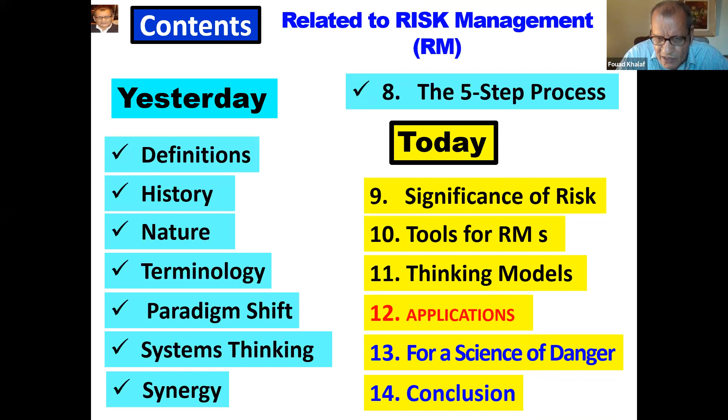In order to make a link between yesterday and today, yesterday Dr. Fatma prepared something, but for my side, I just didn't remember. So, Dr. Fatma, tell us what you wanted to say yesterday. Okay. Thank you, Dr. Fouad.

So, we are going back to talk about the origin of the words risk and hazard. Just a quick reminder that hazard comes from the Spanish azar, which means the roll of dice. And this means that it comes from the Arabic zahr, which is dice in Arabic. Also, the French word hasard, which is le hasard, we don't pronounce the H and D.

This means that it comes from what? From Rezq, the Arabic word Rezq, which can mean God-given or fate. It has been developed in medieval times that risk can come from the Greek word rizikon, meaning roots that protrude and can block your way, or the Italian word risico, the Spanish riesgo, the Albanian rrezik, and the German Rysigo. So this is the root of the word risk.

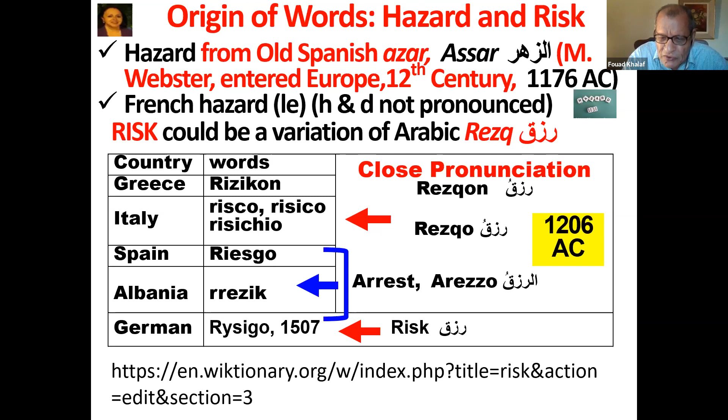I remind you also one of our team is called Ziad Risk. So risk could be a noun, could also take different forms.

Today we are going to talk about tools, what tools we use for quantitative, qualitative analysis. Dr. Ziad will touch this, and thinking models and application.

You see what's written below: risk is not bad or good. In Arabic, it can carry both terms, but mostly good. But in Europe, what we are talking about is the bad side of risk. But it could be bad or good, it just is.

We should not argue about it, and it will exist whether we choose to acknowledge it or not. It is impregnating, penetrating all our life.

The thinking models we are going to talk about are just for enhancing creativity, perception and remembrance. Why? Because as we talked yesterday, risk is relative. Relativity in risk is very high.

Sometimes we don't agree on the same word. The same word may have two different senses, two different meanings, like risk. Risk in Egypt carries a good sense, but also has some ingredients of bad. It depends on the culture, and who is hearing it.

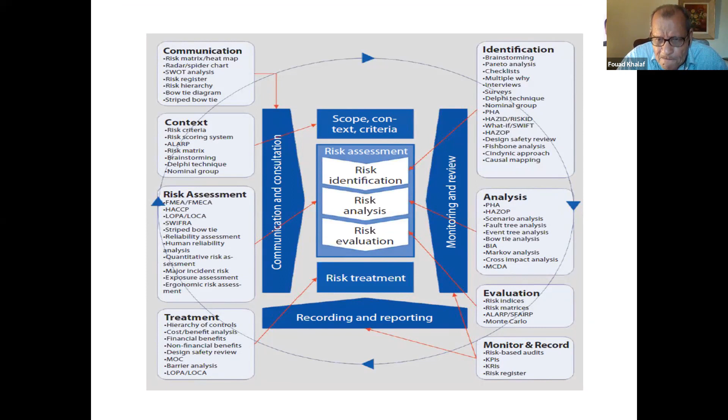Tools are numerous, like what you say, and Dr. Ziad is going to talk about some of them. Dr. Ziad: Hello to everyone.

Yesterday we learned about how to manage risk and its effects on objectives, which requires a structure. International standards give us two important standards for this: ISO 31000, which covers the risk management process, and ISO 31010, which covers risk assessment techniques.

Here in the photo we will see the process according to ISO 31000. That process includes communication and consultation, scope, context and criteria, risk assessment—which includes risk identification, risk analysis, and risk evaluation—and after that, risk treatment or risk control.

After that, monitoring and review, and recording and reporting. During establish purpose and scope of the organization...

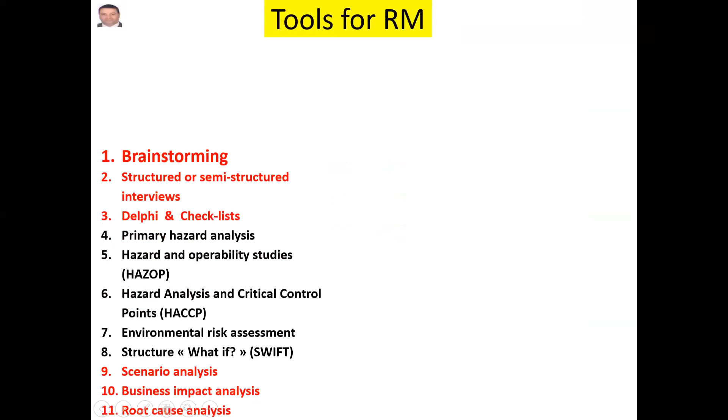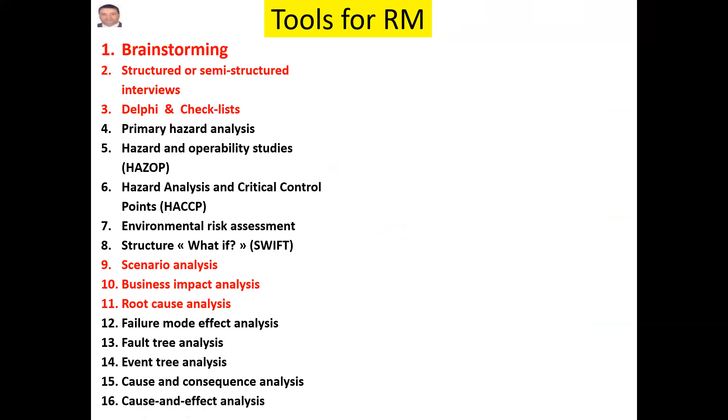...the organization should select or develop a risk assessment matrix that the stakeholders agree to be used in the risk assessment process. This key component is used to define and determine risk levels within an organization.

The context of the risk assessment assignment will determine the size and makeup of the team needed. The risk assessment team should include a cross-functional group of individuals who are familiar and knowledgeable with the hazard and operations. A risk assessment team of about 3 to 10 members seems to work well; less than 3 members may not provide enough insight into the risk assessment.

Here is the process: hazard risk identification, risk analysis, and risk evaluation. Risk, hazard, and source of risk—if risks are to be assessed, hazards must first be identified. This is the first step.

Number two, risk analysis. Risk analysis follows these tasks: determine the severity of consequences, estimate the likelihood of occurrence, assess the effectiveness of existing controls, and estimate the risk level.

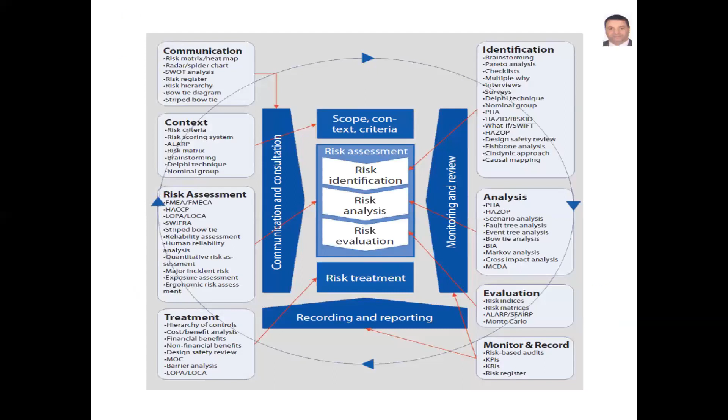And after that, risk evaluation. Risk evaluation involves comparing the estimated risk levels with the defined risk criteria to determine the significance of the level and the type of risk.

Okay, next, here are the tools that come from ISO 31010. We have many tools like hazard and operability studies, what-if analysis, and layer of protection analysis that detects the layers of the systems and evaluates the control system within the system.

FN curve, which is used in quantitative risk assessment, and risk indices. Of all these risk management tools, you must select a tool that's suitable for every step, as explained in the last slide.

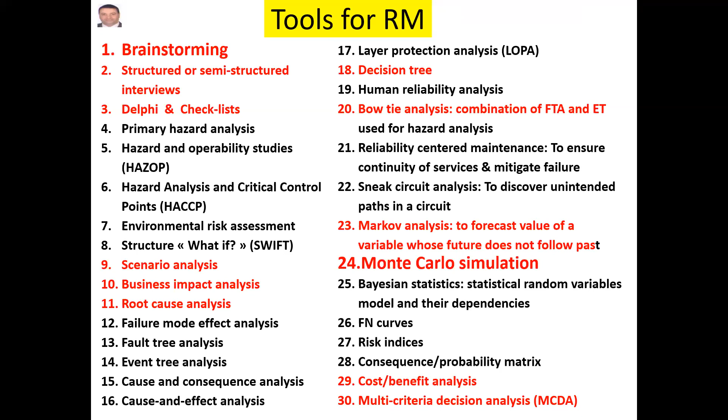Next. Today we will take an example: what-if hazard analysis. This is a tool used to identify hazards; it is well established and widely used.

It is a qualitative method. We learned yesterday that there are many tools, qualitative and quantitative, and also many semi-quantitative tools. What-if hazard analysis is a qualitative method for identifying and analyzing hazard scenarios, existing controls, and needed controls. What-if uses a multi-skilled team, as explained, and answers a series of 'what if' type questions.

What happens if every case in the system? The method has a relatively loose structure. It is a very common method, and it is widely used with checklists.

The first step of what-if analysis is to define purpose and scope, with a clear purpose statement that is specific and measurable.

Number two, assemble team. Based on the purpose and scope, the team should be selected to include experienced, knowledgeable individuals. Number three, communicate objectives and requirements to the team. The facilitator should clearly define the purpose, scope, and objectives.

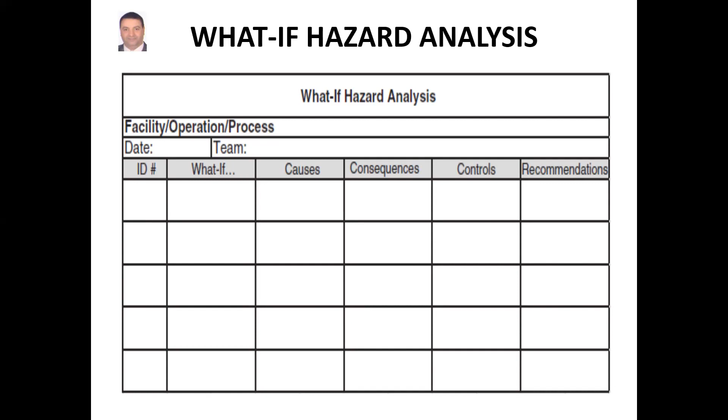Okay, Dr. Hanan is going to talk about the other concepts. Hello everybody, today I will complete with you the common concepts of risk.

Please, from now, you should wear black glasses and act as a movie director, to know that not all of the risk or all of the elements are clear or known. If you saw the Titanic film, you know that not all of them appear on the surface.

Years ago, only health, safety, and environment were the three things considered. They forgot loss of data, loss of time, loss of image, all of this.

The Iceberg model is useful in estimating and evaluating risk. It considers possible hidden elements, especially when handling cost, because it guides the selection of multiplier factors to apply on direct cost or indirect cost to account for.

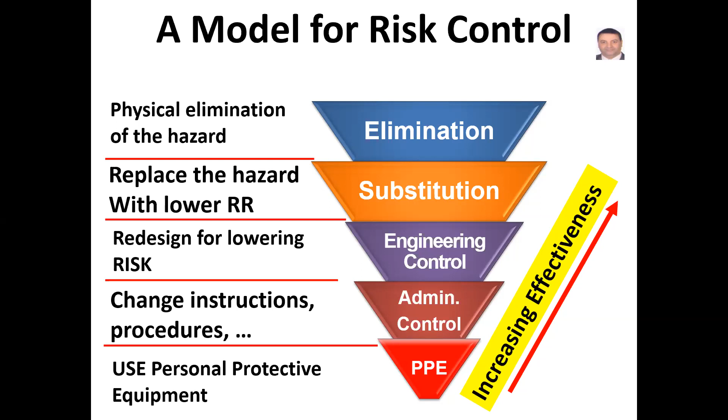Because that layer's methods depend on the human applying the instructions, you can give workers a helmet and safety boots and train them to use it, but they may not apply this and leave them. So it is the weakest against hazard exposure. Their effect is limited and dependent upon proper selection, use, and care.

Here, hierarchy of risk control - we look at how to control risk. Risk control can be split into two things: loss control and risk finance. Loss control includes two items: risk avoidance and risk reduction. Risk finance includes risk retention and risk transfer. We can explain more expressions like risk avoidance.

Risk avoidance is avoiding completely the activity giving rise to the risk. For example, never travel by air to avoid the risk of being involved in a mid-air collision - that is risk avoidance. The difference between risk avoidance and risk elimination: risk elimination usually has a wider meaning. It implies removal of risk without necessarily ceasing an activity completely. Example: redesign of a process to remove a particular risk without stopping the activity.

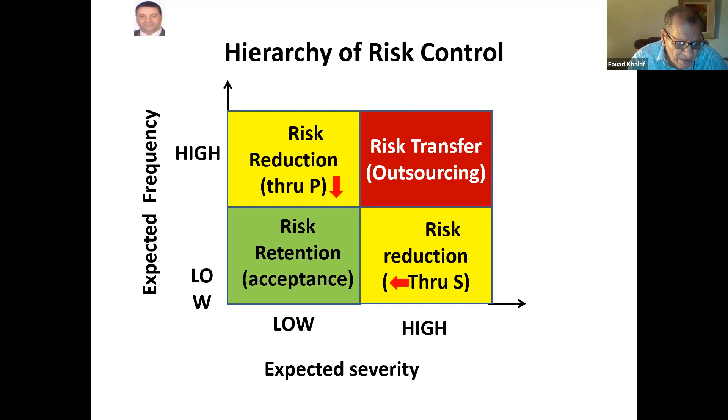Now, Reem, I think you are ready to talk about risk management and decision making. Yes. Thank you, Dr. Fouad.

Here I'm going to talk about the decision-making process and its relationship to risk management. These decisions and risks are very correlated to each other. When we face risks, we need to take appropriate decisions to reduce this risk, but at the same time, our decisions may entail new risks. So it's a cyclic situation. What we need for this is a systemic approach.

Both processes are total quality: plan, do, check, act, or improve.

About uncertainty: when we talk about uncertainty, we have to remember the iceberg model. Each problem is a function of two factors: ability to identify the problem and the uncertainty of the information. These two factors construct the knowledge matrix.

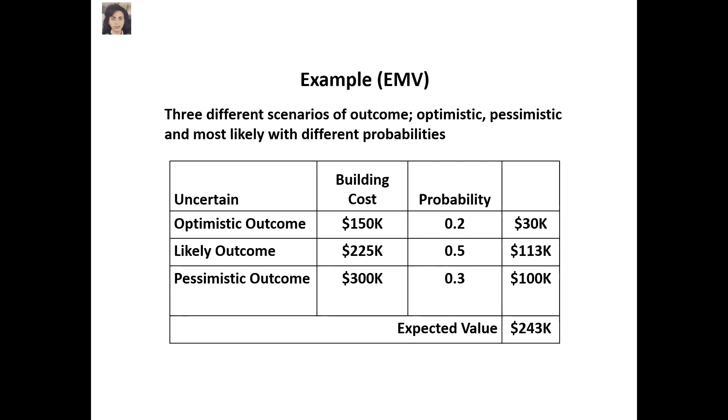Now, how can I take the decision? I need to evaluate these scenarios. I will calculate the EMV for each decision alternative, and you will see that the alternative of upgrading the plant has a higher EMV. So to conclude, we have several models that help the project manager make his decision based on evaluating the risk.

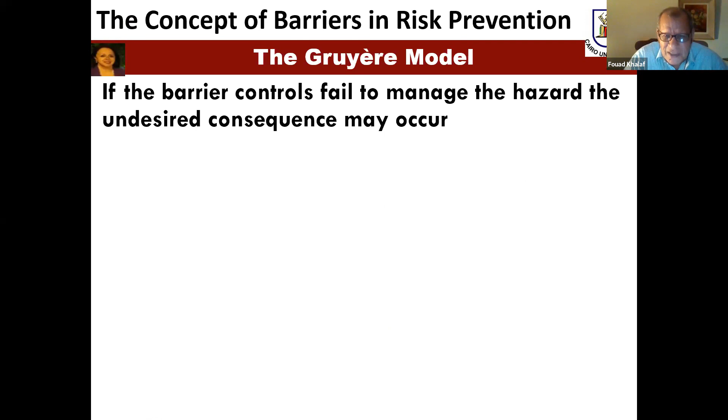So the concept of barriers in risk prevention, which is known as the Swiss cheese model, as Dr. Fouad has mentioned, the Gruyere or the Emmental, which is with holes. So what is this concept based on? It is based on two approaches: the multi-layer defense model developed by James Reason, and the tripod theory of accident causation developed by Shell International Exploration and Production.

So if the barrier controls fail to manage the hazard, the undesired consequence may occur. We have many layers. The hazard passes through many layers containing holes. So even the best barrier will not be perfect. It may have holes. So as we see here, an undesired event will happen, then we won't be able to prevent escalation, and we will have consequences. So this model is developed to really identify and understand some of the accidents happening. Next slide, please, Dr. Fouad.

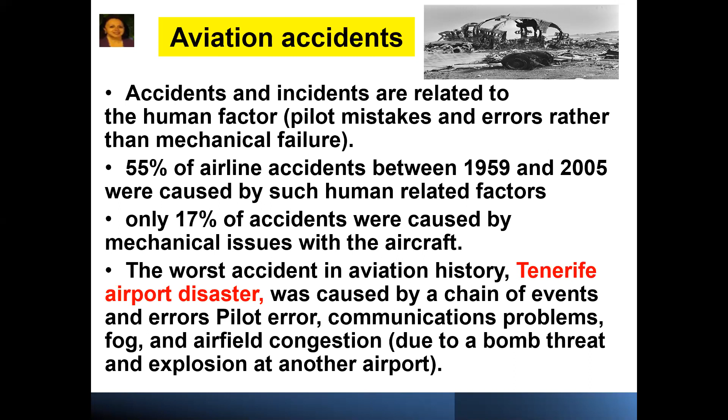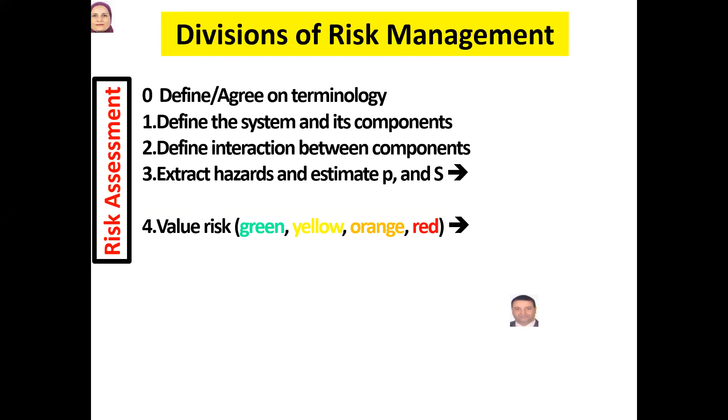Okay, to conclude what we said, we want to make a risk management that we said has 5 steps. The first 4 steps, which we called risk assessment: at first, at 0 level, you should agree on the terminologies. Because if you are talking in another language, your estimation or assessment won't be right. So you should define and agree on the terminology, so all of the team will talk in the same language. Then begin to define the system and its components, as we said, four corners, with actors and the environment and the process and everything.

Then define the interaction between components. To define interaction between components, you should think not linearly, but by system thinking, because as Dr. Fouad said yesterday, the correlation will be not linear, but you should multiply n times n minus 1. For that, you should define the interaction between all the components in the system, which you define its boundary and separate the system from the outside.

Then after that, you will wear black glasses and begin to extract hazards. For every hazard, you should estimate the probability of the undesired event to happen and the negative consequence, which is called severity S, because we estimate the risk number, which is the multiplication of probability times severity. After you make your estimation, you begin to evaluate. When you evaluate, you want to know the value of the risk.

Here in our lecture, we make our matrix with 4 levels. You can do more than 4. But as Dr. Fouad said yesterday, we prefer an even number to be more honest, because with any odd number, if I choose 5, all of the time I will choose 3. For that, you should take an even number. Here we took 4 times 4 in the matrix; the safe zone is green, the highest risk is red, and in between yellow and orange.

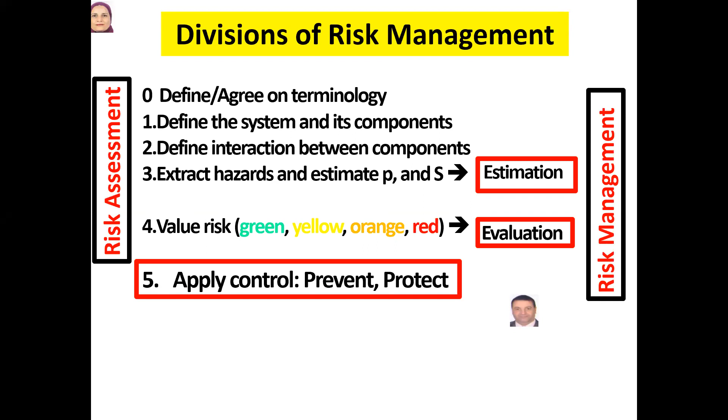After you evaluate your risk, if it is accepted, you go to documentation. If not, you should apply control to prevent by decreasing probability or protect by decreasing severity.

Dr. Ziad will complete about the 4 risk ranks and the diagram. Let's go. Yes. Please, Doctor.

Here we will see the risk matrix. Risk matrix is a method to measure the risk. It is between probability and severity. If we use words to explain the risk matrix like low, high, it is called a qualitative risk matrix. But if we use numbers 1, 2, 4, it's called a semi-quantitative risk matrix. Another figure is called ALARP. ALARP is an abbreviation of as low as reasonably practicable. These expressions come with the study called QRA, quantitative risk analysis.

If we divide risk analysis into 3 categories: qualitative, semi-quantitative, and quantitative, of all operations in any facility, 100% of these operations may apply a qualitative risk matrix, like HAZOP, what-if analysis, and checklist brainstorming. It's called qualitative risk analysis. But when we use the semi-quantitative risk matrix, only 10% of the activities, like layer of protection analysis. In the third stage, 1% call for QRA, used for the petrochemical industry that impacts the environment and safety, and maybe fires and explosions that affect the surroundings of the facility.

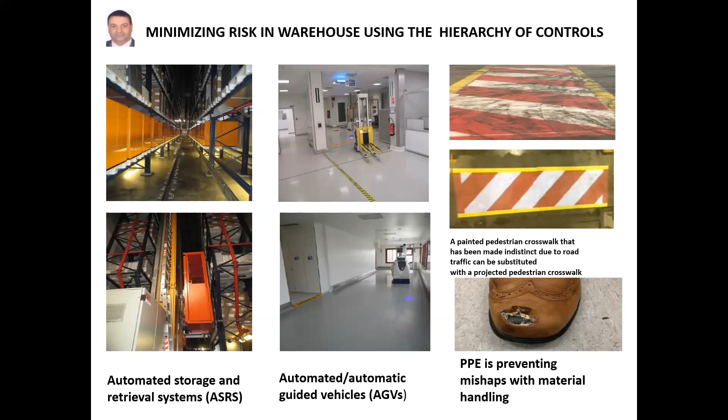Okay. Thank you very much, Dr. Ziad.

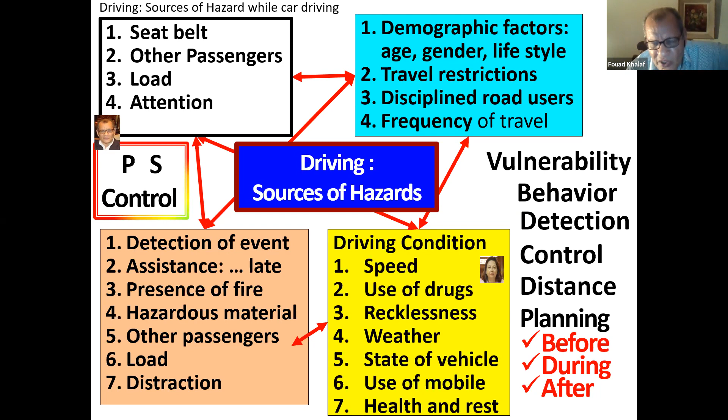Having a motorcycle and not having a helmet, how do you call it? This is a near miss, we call it in risk. This is something undesirable in other cultures. Okay, now risk management in medical.

The 6 coming slides, I would like to shorten it because we have now somewhere around 15 to maybe maximum 20 minutes. Okay. Salma, go ahead. Okay, Dr. Fouad, happy to be with you.

Let me, in short, tell you that medicine deals with uncertainty. We are dealing from the history of the patient. We don't know what the diagnosis is, what the investigation results are, what the management plan is. So we are dealing with uncertainty from the beginning, and risk is considered in diagnosing disease, in its causes, and in the management, whether medical or surgical.

Health components should be in balance: physical, mental, social, environmental, and spiritual. This is my comment on the question from yesterday about components, because health has 5 pillars. Patient safety is the best example for applying risk management, using the terms, and reflecting it.

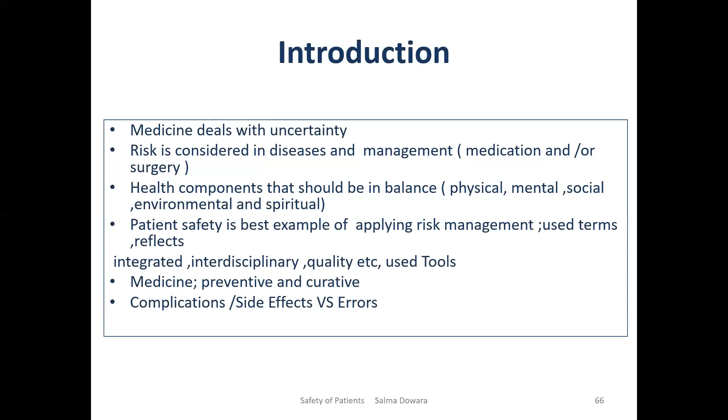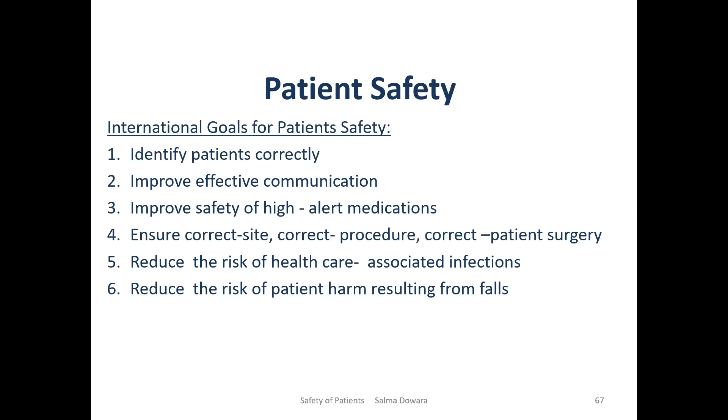In patient safety, the goals are mainly to identify the patient correctly, improve effective communication, improve safety of high alert medication, ensure correct site, correct procedure, and correct patient surgery, reduce the risk of healthcare associated infections, and also reduce the risk of patient harm resulting from falls.

When we make documents, types and examples of error are not different from what we have discussed before. Adverse healthcare event: commission or omission arising during clinical care, causing physical or psychological injury to a patient. Error is the failure to complete a planned action as intended, or the use of an incorrect plan of action to achieve a given aim. Healthcare near miss, it is the same as we have said before. Adverse drug reaction: a response to a drug which is noxious, unintended, and occurs at doses used for prophylaxis, diagnosis, or therapy.

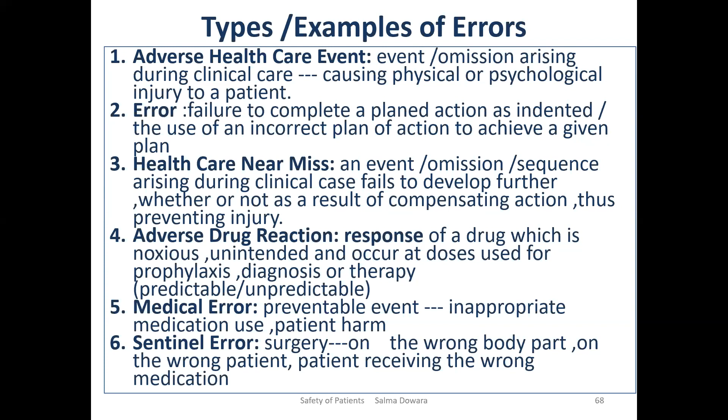Medical errors: a preventable event, inappropriate medication use, and causes patient harm. Sentinel error, or surgery on the wrong body part, or the wrong patient receiving the wrong medication. We should discriminate between errors or mistakes and the complications of therapy. This is for doctors, not for you.

When we come to types of safety, they are the same: environmental, medical safety, surgical safety, electrical, laboratory safety. Very important, because we have a checklist for safety in labs, as Dr. Hanan told us. Sanitation, infection control, and blood safety. This is a big category. Equipment installation safety.

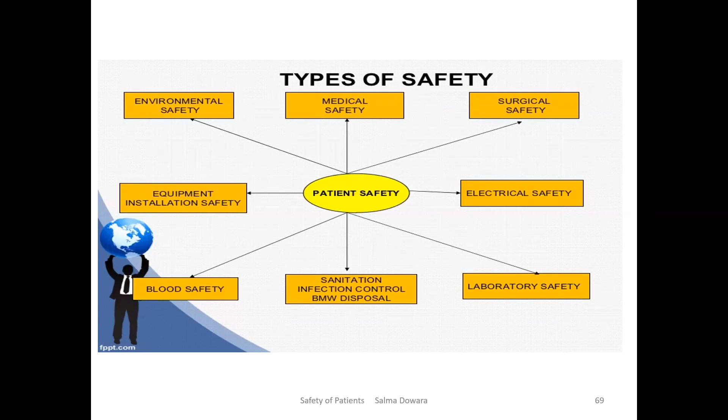Next slide please, Dr. Fouad. Yes, to minimize these errors, in the beginning we should agree on the terminology, because sometimes we use errors, sometimes mishaps, sometimes mistakes. So this is for discussion. We use the WHO checklists, and the best example is in surgery: pre, during, and post. Proper techniques, and this needs training, of course. Full documentation, very important, because we return to it and make many researches from it.

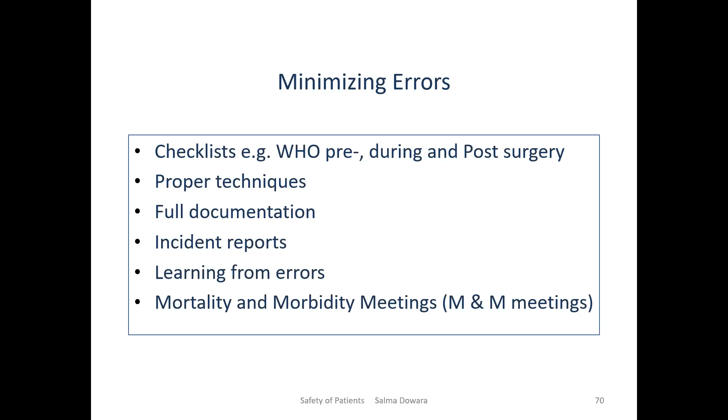Incident reports: there is a process of incident reporting, and we should make an environment and culture of no blame, no punishment, to learn from errors. So we make meetings for mortality and morbidity, to allow people to tell the truth, discuss the mistakes and try to overcome them. And when we discover a defect, we make training and awareness orientation. This is very important. Next slide, please.

These are the WHO lists for the sign in, time out, and sign out. This is pre, during, and after closure of the wound.

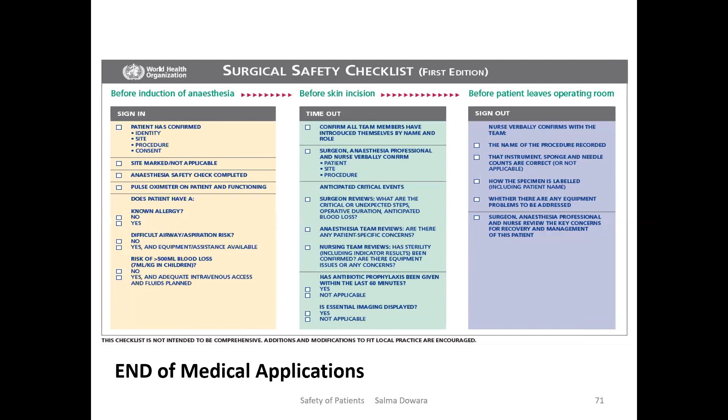This is the shortest presentation I have made. This is a special reduction for you. Thank you.

Okay, now an application on the drilling profession about selection of a casing tender. We have in the Gulf of Suez a certain formation, active salt, that can push on the casing and cause it to collapse. The problem was that in the past we were running a lower grade 9 5/8 inch casing. Imagine a drilling plan for 40 development wells. The source of the undesired event is an active salt bed between 10,000 and 10,500 TVD. I'm using drillers' terminology, but it follows the same principle of risk.

The undesired or feared event in this case: we run pipe, we cement it, and later we discover it collapsed, it's been damaged. Why? Because the salt moves with time and closes on the pipe, and the pipe is not designed for this. So the best way is to select a pipe that can resist this for a certain period of time, which is the life of the well.

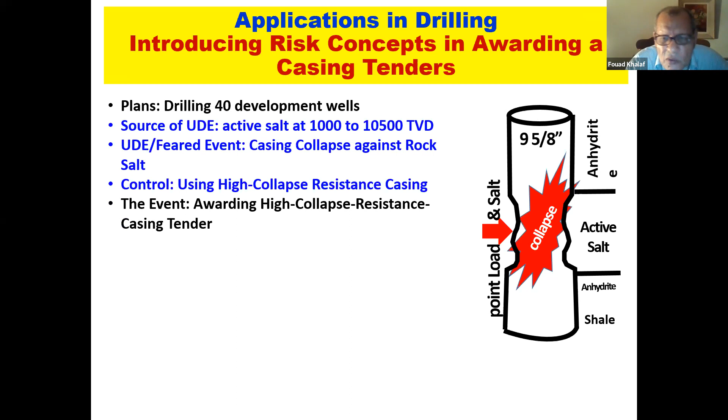In this case, we want to issue a tender for 40 development wells, 500 feet per well, majorated by 10% more, and we will introduce risk management in the evaluation of this tender. The objective is to show how risk influences decision making. The apparent decision goes to the left. With risk, the right decision comes later on.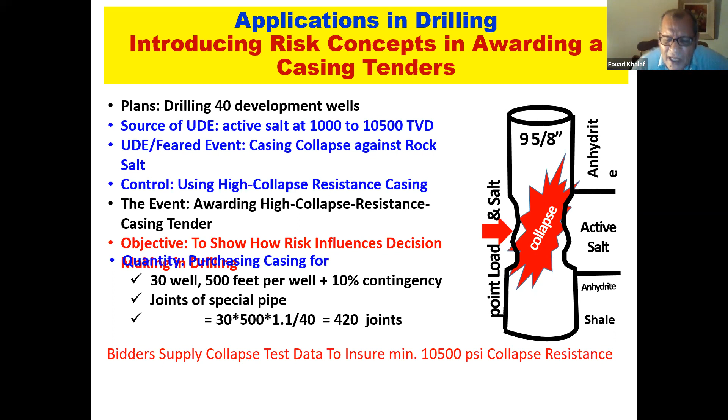The quantity we have to purchase is for 30 wells, sorry, I changed the figure, 30 wells, 500 feet per well. This means we have to order 420 joints of special high collapse resistant casing. Bidders supply in their technical envelope test data run by the mill while manufacturing the casing, which will be used later to define a probability of failure or of satisfying requirements to prevent casing collapse.

The parameters: we have data on the collapse resistance of the casing from two companies, Company A and Company B. They gave us, say, 50 data points. What's the average collapse resistance in pounds per square inch? It is 10,850 for A, and B is higher. Higher is better, but we will see later that maybe higher is not better. Standard deviation plays an important role here. The dispersion between the tests is higher for B than for A.

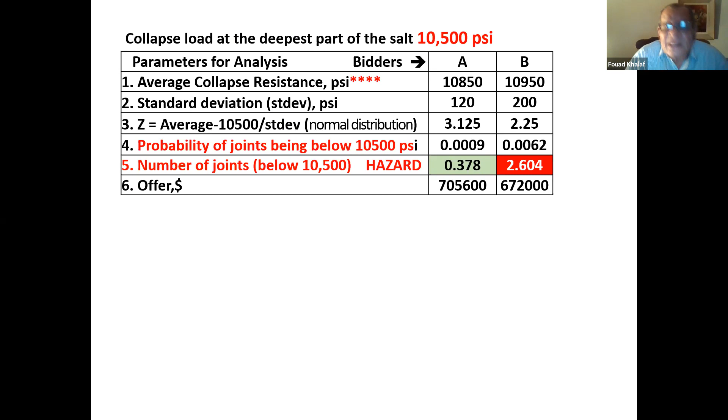The Z factor, determined and defined here, is 3 times the standard deviation for A, and only 2 times for B, and this is very important for the decision later on. What's the probability of having a pipe less than the desired value of 10,500?

Because if it has something less than 10,500 psi, it's going to collapse sooner or later, and we lose a whole well. A well may cost between 5 million to 12 million, and even more if it is offshore.

So the probability for A is 9 times 10 to the minus 4, that's 0.09%, and for B is 0.62%. Now the number of joints, if we apply this probability on the number of joints, which is 420.

A, in the lot of 420 joints, there is a fraction of a joint. Then I would say there is no joint below recommendation or below desired value. Whereas for B, we have 2 or 3.

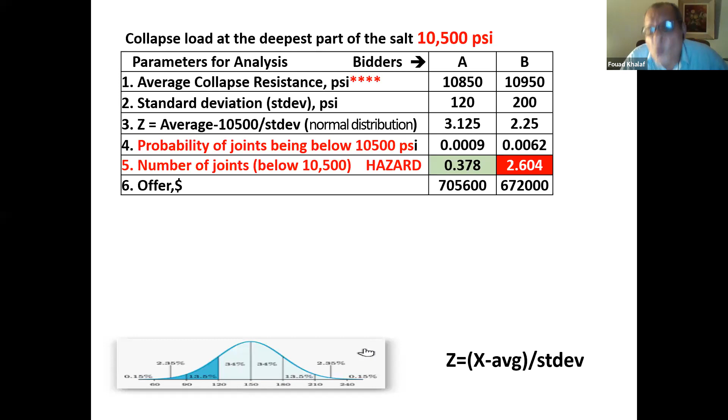Okay, we don't know them. They are stored in one place. Sometimes when we pick casing by hazard like this, because all of them are of the same grade, maybe those 3, we will run them in one well, or maybe in 3 wells, which will be even more catastrophic.

Okay, bidder A supplies satisfying requirement. Why? There is no one defective joint in it. Bidder B gives us 2 to 3 defective joints. The 3 joints may be used in 1 well or spread across 3.

Okay, what if one well is damaged? The cost will be of the order of 5 to 7 million. If all 3 are damaged, then the cost can go to 21 million.

If you go with the administrator and the people and select the cheaper option, you may run the risk of damaging up to 3 wells, costing you 12 million or even 21 million dollars.

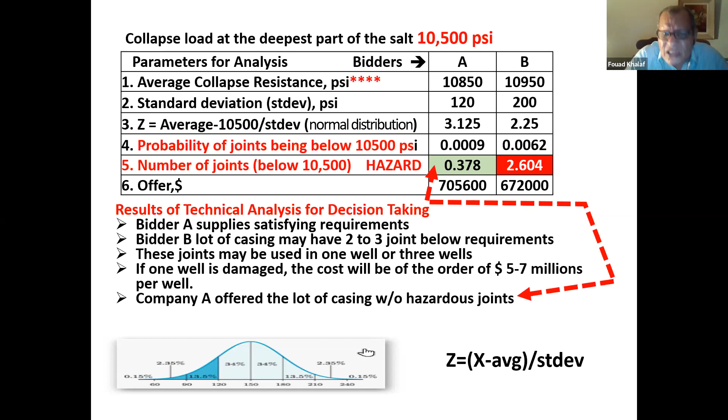So actually the decision is to select company A. Conclusion: company B provides the lowest offer, but company B's casing may entail the risk of losing 1 to 3 wells. This may cost the company between 5 million and more.

So the recommendation: accept the higher bid, against maybe the common logic we have, but there are technical justifications for this. Why? To avoid potential loss of 5 to 15 million dollars.

The comment: potential saving for this decision, potential saving from 5 to 15 million, against the cost of awarding the tender to company A which costs us a sure loss of 33,000 dollars. But the cost-benefit ratio is in our favor, it's only 0.2% to 0.7%, and this is negligible and acceptable, even less than the insurance we have for 1 well.

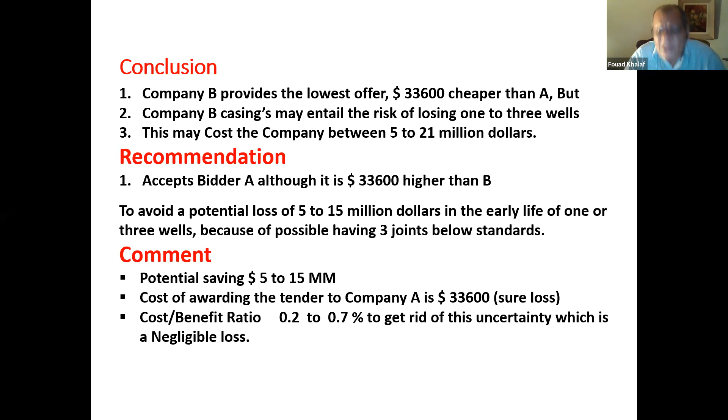So this is an example of how, if you introduce risk into the tender process, and this is a short example for drilling, you can invert the decision. Okay.

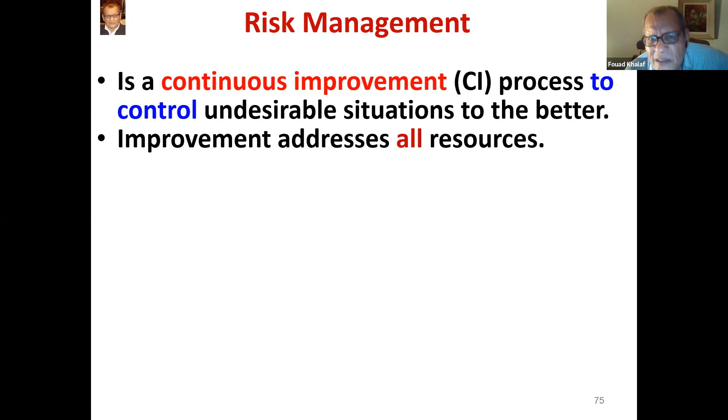Now to approach the conclusion, I think running a bit late, 5 minutes. Risk management, perceived this way, is a continuous improvement process to control undesirable situations, to bring them to a better state. Improvement addresses all resources. Risk management targets all sorts of waste.

Now we talk about waste. Now we talk about risk management. We talk about evaluation of tenders, especially those hindering safety or the objective of business. Effective risk management improves efficiency of the whole system, because it targets synergy, achieving total quality.

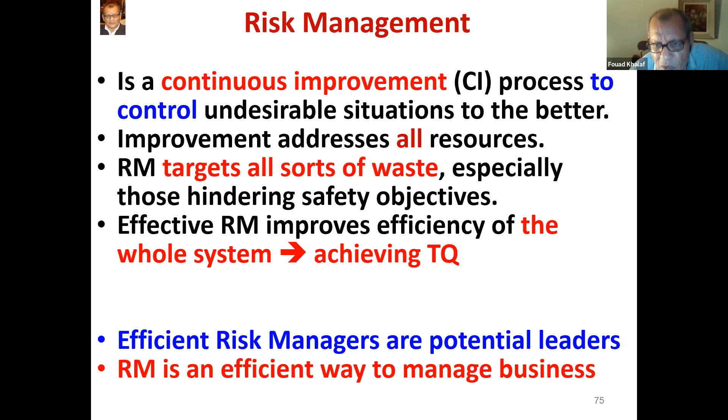This is very important. Efficient risk managers are leaders, by the way, because they are very close to human beings. Risk management is an efficient way to manage business. Improvement of system efficiency is a measure for the success of risk management.

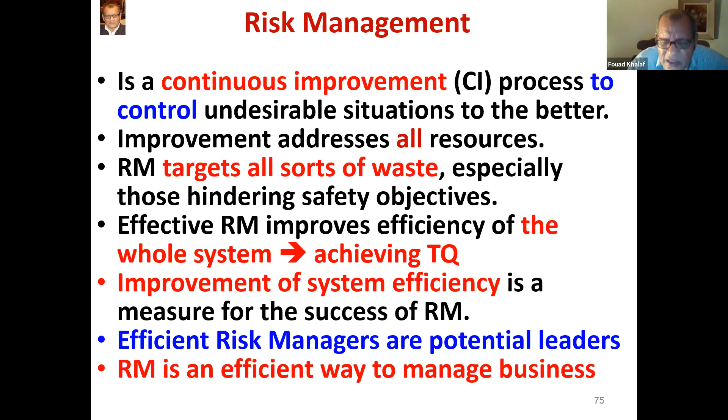As a result of running risk management, you will get system efficiency, and this is the objective of conventional management. So we can achieve the same objective through risk management.

The sub-product of risk management is better management of resources, less pollution, achieving or having a cleaner environment. Why? Because we don't waste, we don't pollute.

Better social rapport, which is the distinction between risk management and other forms of management. Better quality of life, sustainable development, because we maximize use of resources, and if we maximize it, we don't waste, we leave something for the next generation.

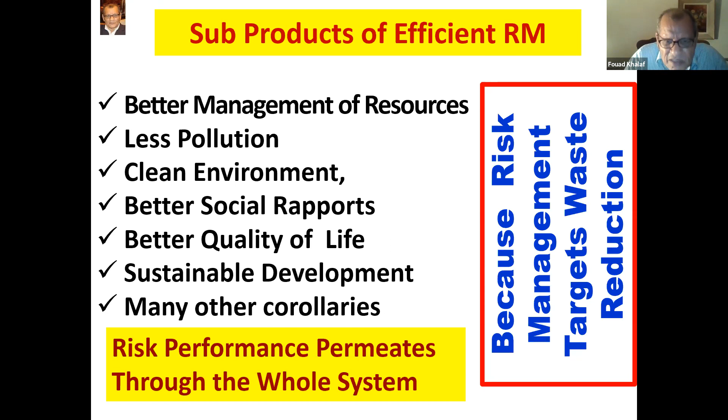So we will be praised by our kids. Many other corollaries will exist, and you will find later on that the progress, the economy, the state of life of a country who observes risk management is a place where people like to live in. Risk performance permeates through the whole system.

It's a general conclusion. We would like now to propose what we designed for this presentation: a general science of waste, of danger, of something that hurts resources. And this will represent the trunk of a tree.

It's going to feed back into all sciences that target human safety, say risk, crisis management, environment, resilience, something cherished by Dr.

Fatma. You want to say something about resilience, Dr. Fatma? Or, yes, leave it for the next slide.

So the science of danger, as we call it, or risk management, and the next one, resilience. This is what we propose: it's an umbrella. Risk management, or the science of danger, is an umbrella or a tree that sheds shade to all other sciences. Systemic risk management is a transdisciplinary science. We saw it in timber, medicine, chemical, radioactivity, and others. The synergized knowledge of the whole will have myriad advantages.

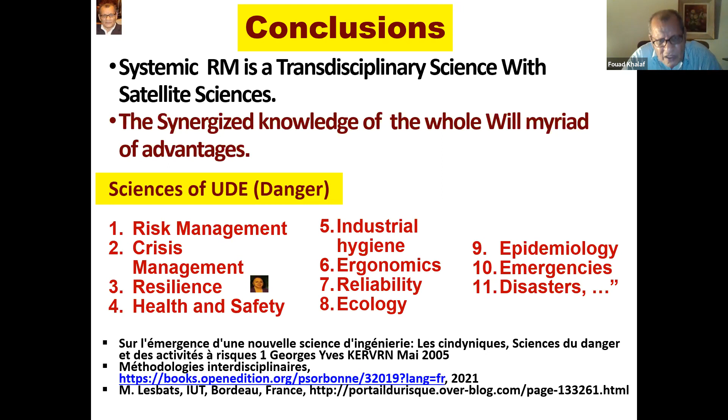We lost a lot of things. We should not be desperate, because if we are not desperate and are armed with psychological tools, we can recover, go back, and even exceed the previous situation. Thank you very much. So I finish this with a call.

Science of danger—I hope that we spread the word. There are researchers in the world who can join us. I know in France they like this, and this is going to create a lot of research for academicians. This will spread the word so we can use our resources in a better way. This calls for cooperation.

For anyone hearing us, please respond to the call. Let us continue this contact, make a forum at least, because there are people very well advanced in this field somewhere, and we would like to benefit from them. This will shorten the way for us to achieve continuous improvement, system thinking, synergy, risk management, resilience, and also protection of the environment, and finally, the benefit and welfare of human beings. Thank you very much.